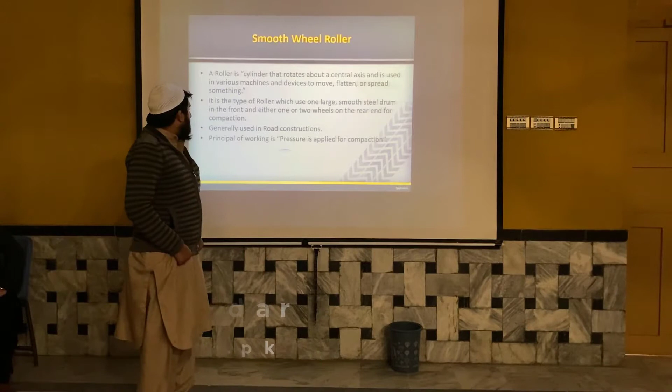A smooth wheel roller is a type of roller which uses one large smooth steel drum at the front and either one or two wheels on the rear end for compaction. Generally, these rollers are used in road construction. The working principle of these rollers is that pressure is applied for compaction. These rollers are mostly preferred for cohesionless soil, meaning they are effective for compacting silty or sandy soil, but not for embankments and for soft turf.

These are some images of a smooth wheel roller. You can see here we also have a video of a smooth wheel roller. These are the smooth wheel rollers which are used for road construction mostly, and you can see that it consists of a drum which presses the soil and is used for compaction. Now I will invite my next group member to proceed with the presentation.

Now our topic is the pneumatic roller, also known as rubber tire rollers, because pneumatic rollers have rubber tires. This type of roller consists of a heavily loaded wagon with several rows of 4 to 6 closely spaced tires. Like we can see in the picture there, the roller has 4 tires and they consist of rubber. So that's why it is called a rubber roller. It provides uniform pressure throughout the width covered, all the width it can cover throughout the compaction area.

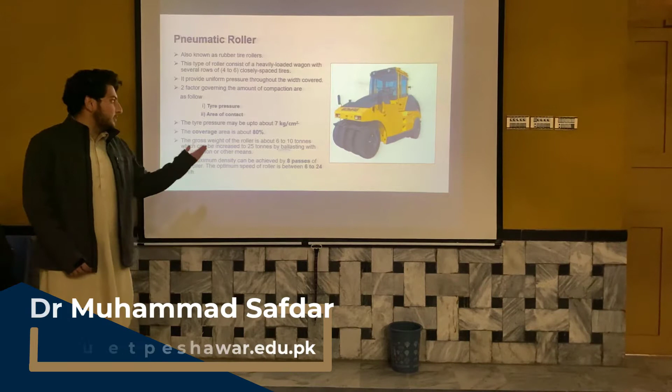It provides uniform pressure. Two factors governing the amount of compaction are as follows. One is the tire pressure, like the weight provided by the wagon provides some pressure on the ground, and the other is the area of contact, all the area that it comes in contact with. The tire pressure may be up to 7 kg per centimeter square. The coverage area is about 80%. The gross weight of the roller is about 6 to 10 tons, which can be increased to 25 tons by ballasting with steel sections or other means.

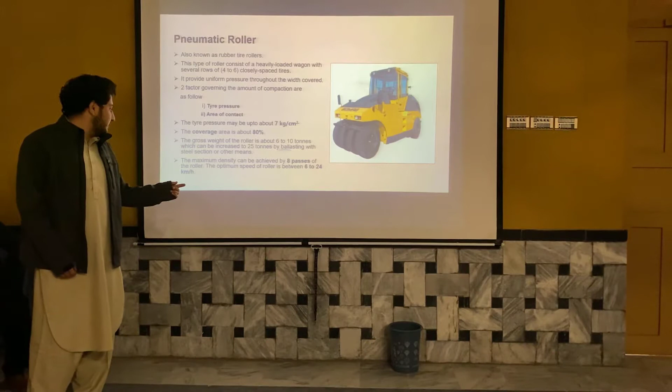The maximum density can be achieved by 8 passes of the roller. The optimum speed of the roller is between 6 to 24 km per hour. This is the speed at which the roller moves. This is suitable for compaction of soft base, coarse material or layers of loose soil, and they are also used to finish embankments compacted by sheep foot rollers. These rollers are also suitable for compacting loosely graded sands and fine soils, while they are unsuitable for very soft clays and highly variable soils. It can be compacted with the help of these rollers.

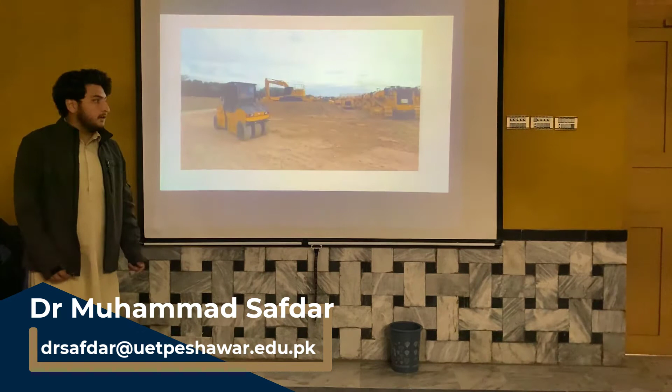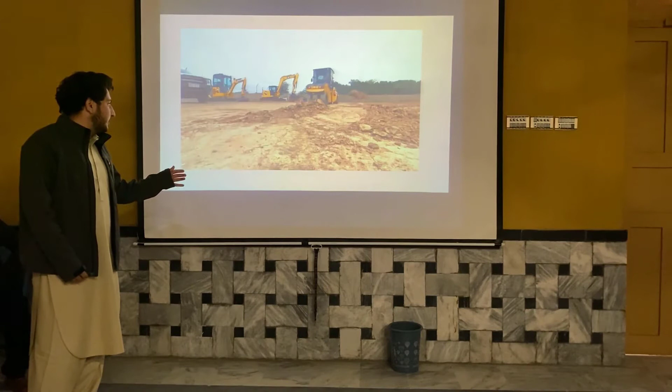And this is the video of the roller, and in this roller we can see that behind the roller we have 4 wheels, while in front we have 3 wheels, and it's actually a rubber tire.

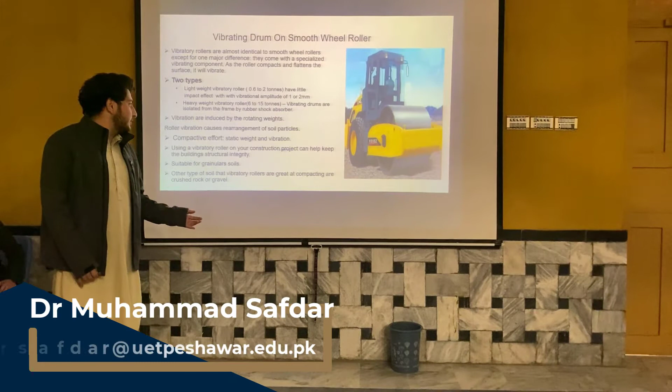A heavyweight vibratory roller has a weight of 6 to 15 tons, and its vibrating drums are isolated from the frame of the roller by shock absorbers. Shock absorbers are provided between the vibrating drums so that they cannot come in contact with each other. Vibrations are induced by the rotating weights. Roller vibration causes rearranging of soil particles. It rearranges the soil particles and then they come in contact with each other, so it gets compacted. Compaction is afforded by static weight and vibration.

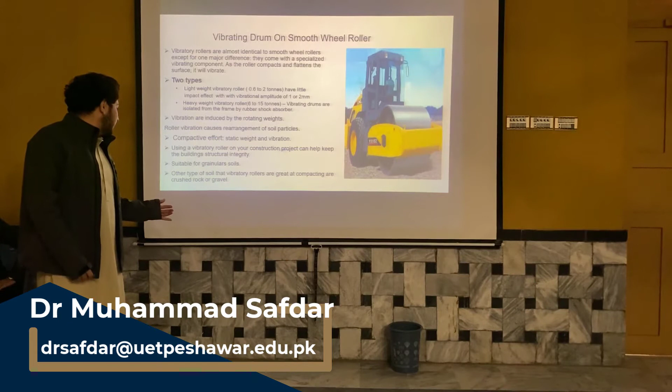And using a vibratory roller on your construction projects can help keep the building's structural integrity. Suitable for granular soils; other types of soil that vibratory rollers are great at compacting are crushed rocks or gravels.

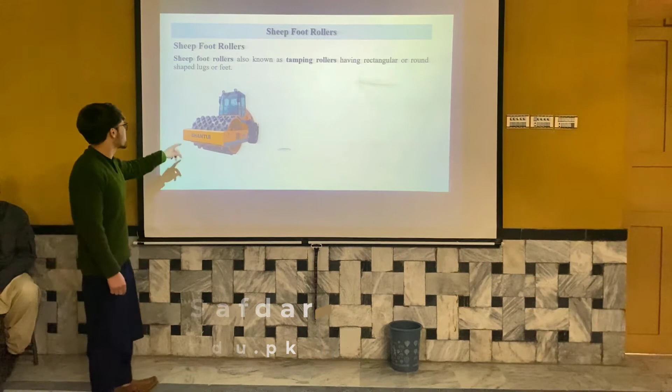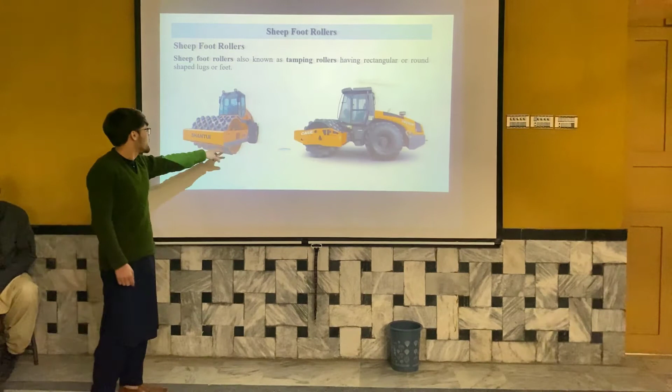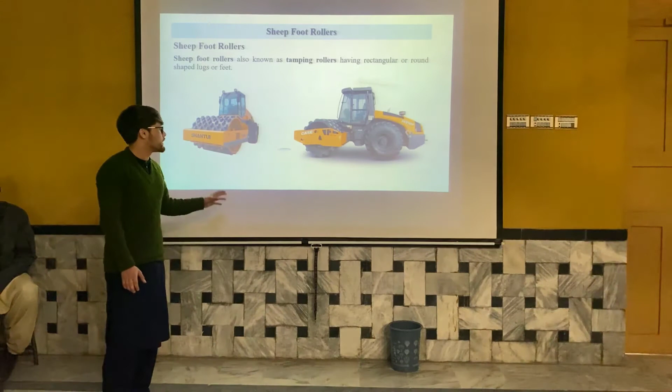Now the sheep foot rollers are also known as tamping rollers. They have rectangular or round shaped lugs or feet. From the construction, you can see this type of roller has two rear wheels and one front wheel or front drum. Actually, this drum may be completely filled or it may be hollow. This hollow drum sometimes may be filled with heavy materials, like water or some soil, whenever we need much more compaction.

Now the question arises why they are called sheep foot rollers. Because in the very early age, when there was no concept of machines, people were using their cattle and particularly their sheep for the compaction of soils. At that time, they were using their animals for compaction. But with the passage of time, they started to think how to improve this work to make their compaction easier and efficient.

So on the basis of this concept, they designed the sheep foot rollers, and this is the main reason why they are called sheep foot rollers. And from the picture, you can see that the front wheel consists of projecting spikes, which look like the feet of sheep. That's why these are called sheep foot rollers.

Now, some important and common uses of sheep foot rollers are compacting earthwork in embankments and in canals. This type of roller is mostly used there. Sheep foot rollers help in mitigating any voids in a road or an area where there are cracks and holes that can be made weaker by the vibration from heavy vehicles traveling on them. They are also used in construction of the subgrade layer in road construction, and for compaction of soils containing fine grains, clay and also sand, gravels, etc.

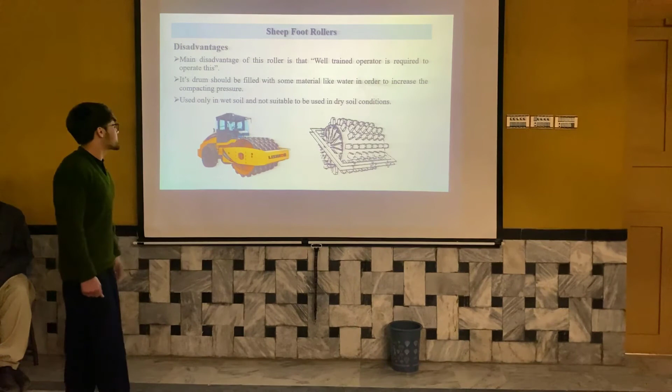Here are also some disadvantages of the sheep foot roller: it requires a very well-trained operator to operate this type of roller. Similarly, this hollow drum must be filled with some heavy material in order to improve the compaction effect. It is also a disadvantage that this type of roller cannot be used in dry soil conditions. It must be used in wet soil conditions.